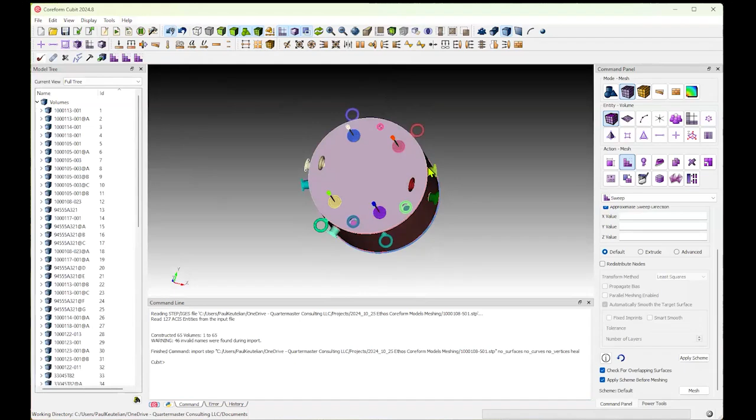I have Cubit here. As Matt mentioned and other videos have demonstrated, Coreform Cubit has an excellent import capability that lets you pull any geometry from other CAD tools. And I want to call out too that this is a pretty heavy assembly. It's got dozens of parts. There are some repeat parts in here, and opening this up in SolidWorks and NX can take a fair bit of time. And so even just getting to the relevant parts in Cubit is beneficial.

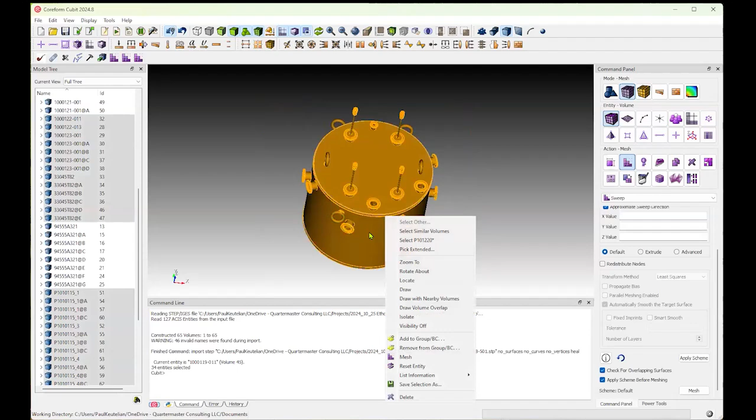Then again, if I'm trying to get to the heaters, it's easy to do, Control Shift Select and just clear out the materials that you don't need. We can start to see that the heaters are here underneath, and again, very lightweight. And here we can see there's some repeat parts here, and hitting the select similar volumes makes it easier to select these parts and then get rid of them also.

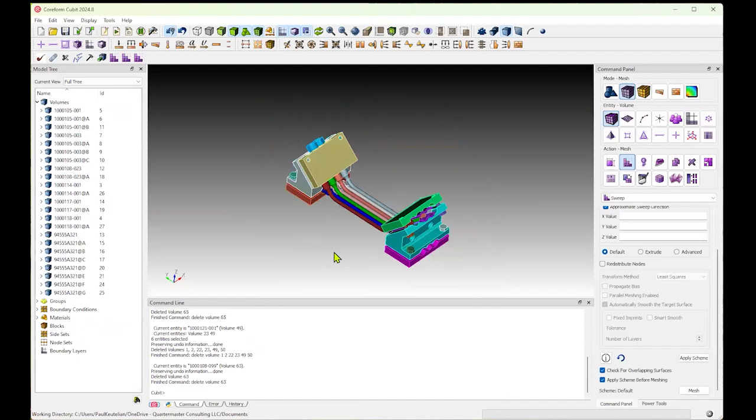And so we can see in 30 seconds, if I had no further knowledge about what the heaters are, what's in this thing, being able to use this tool will let me get there in under a minute. So for the sake of this demonstration, I want to go a little bit deeper and again, use similarity selection to select these bolts, these other clamps, and clear that away. And now I'm down to the heaters and these contacts.

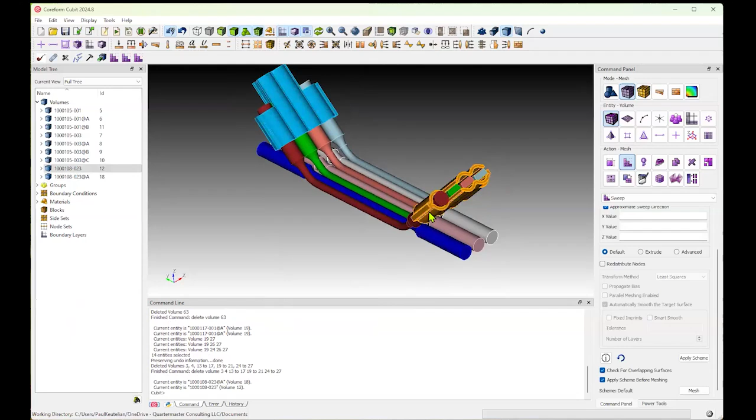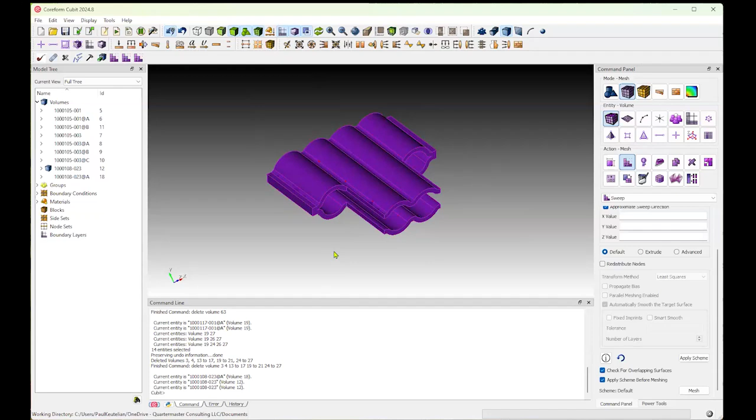And I want to share some tips about web cutting geometry like this. So this doesn't look that complicated, but what I've found is that with web cutting, what you're trying to get out of this is you're trying to make it easy for Coreform Cubit's mesher to understand the cleanest way to produce a mesh. And what I have found is that there are two goals that I pursue. One is to try and get to hex meshing everything as much as possible.

Hex meshes are nice because the matrix is a little bit stiffer, the solutions are a little bit more stable. They conform to geometry a little bit better, and it's fewer nodes. It's computationally easier because you have so many fewer nodes and connections for each of those versus like TET meshes.

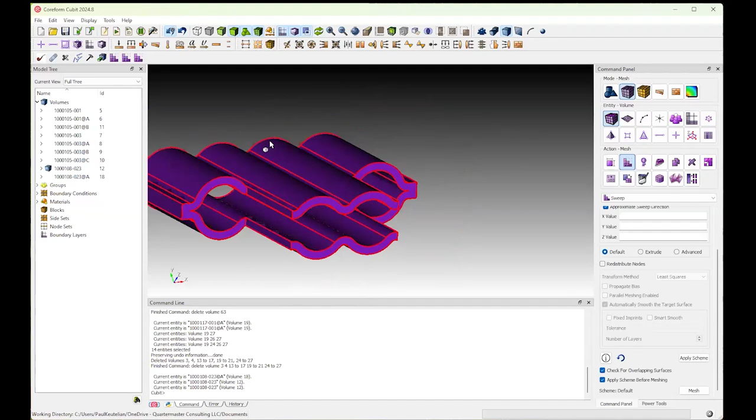So with something like this, there are some corners here. There's some complex curvatures here. So I'm going to go ahead and work through this a little bit. In this case, I'm going to say, well, I care about the corners. You could decompose this and just turn this into a smooth surface. But in my case, that's not what I need. So I'm going to start using these features to start cutting away and actually split this apart into multiple different bodies.

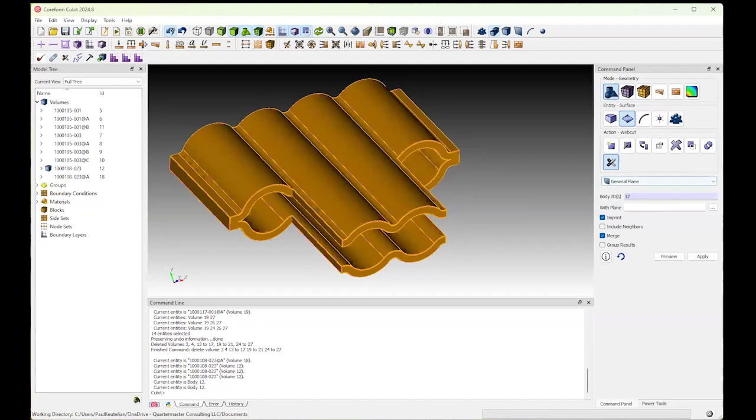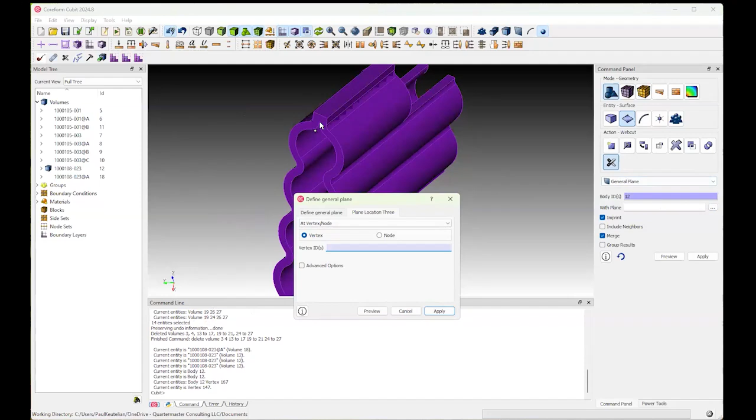In here, when I'm picking how to do this decomposition, what I would like to do is use as much of the features of the geometry itself to define where the cuts are going to be, because that enables me later when I check the journaling file to have a consistent solution if the geometry changes. Very much with these types of things, the team is testing out different parts and different types of solutions. So I can't very often rely on specific coordinates to work on.

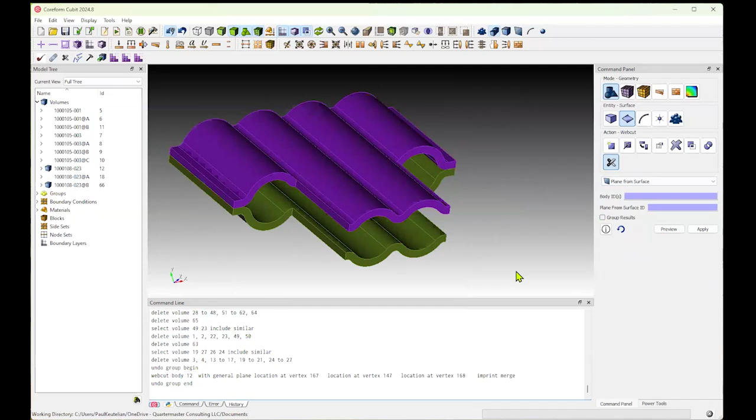So as I do this, you can see in the history, this is keeping track of specific vertices, specific locations, specific planes. And that's going to become handy later when I script this. So as you can see, I'm also cutting away at some of these wings here so that I can create rectangular pieces. And those have been a bit easier to mesh for me.

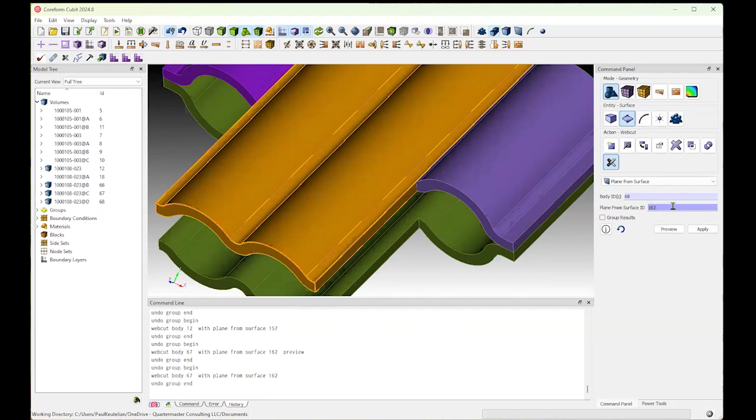And then here too, in this corner, this discontinuity, I'm going to want nodes at these specific positions too. So again, I'm going to make one more cut right here just so that the meshes between these volumes line up. And then, from other tutorials online, one of the lessons you learn is that you should mesh from the most constrained volume out. So I'm gonna isolate this one to be able to work on it.

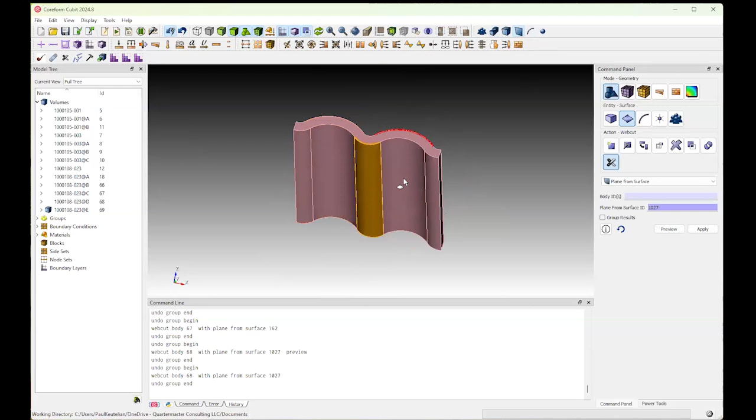And one of the things I want to show here is now we've got to deal with this complex surface. So you can see these different surfaces here. It would be a many-to-many mesh, which would be pretty difficult to do. But by using the composite feature, which I've shortcutted here, I can now look at this volume, control click to select them all, and there we go.

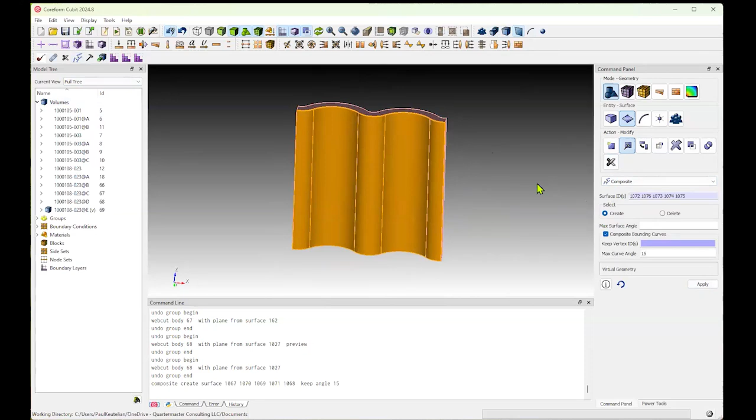Now this virtual geometry has been created, which lets Coreform Cubit know that this should be treated as one surface. And then in the mesh definition, I can focus on the resolution of that surface. So now I've changed this many-to-many surface sweep problem to a one-to-one. So now we can go here into the mesh.

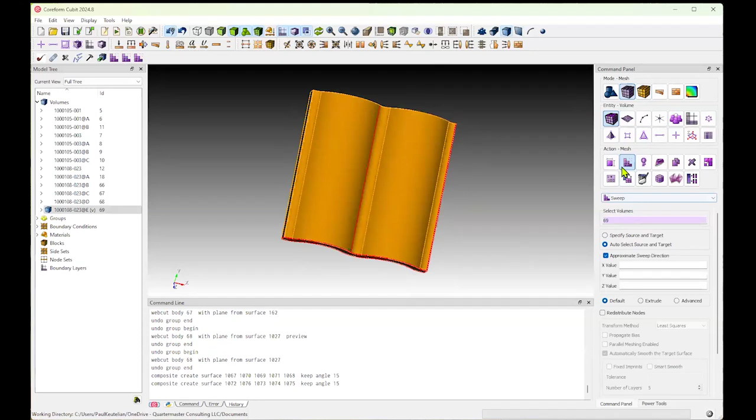A lot of my teams are not worried in the early phases about specific solutions to things. They're worried about a general idea of where things are to concentrate on. So if I'm doing that, I can assign this a map surface mesh. And then for sizing, in this specific case, automatic sizing actually works out okay for me, because again, they just need a general case of it. And this comes with your own experience with the tool. But of course, Coreform Cubit has many of the other features as well.

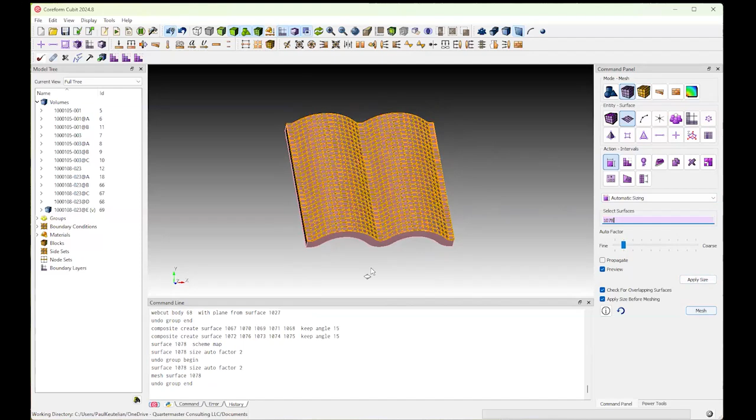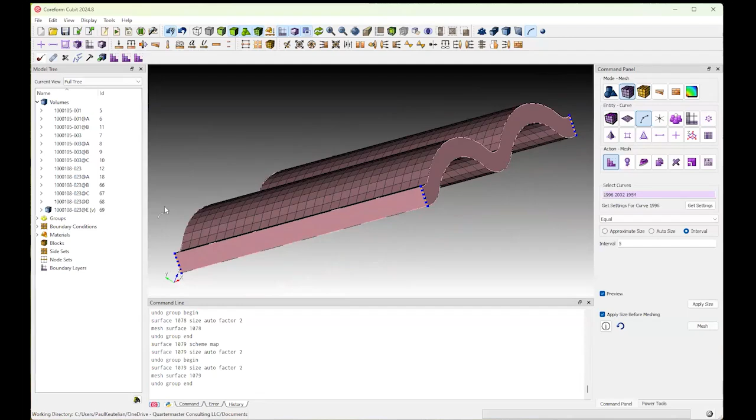So I'm going to do this surface up here, and then I'm going to make sure to apply the same properties down here and mesh these two. And then from your multiphysics modeler, so in this case, MOOSE, there's documentation on how many layers of nodes should be between top and bottom layer to get good solutions. So I believe the solution in MOOSE is at least 5. So I'm going to mesh these as a curve.

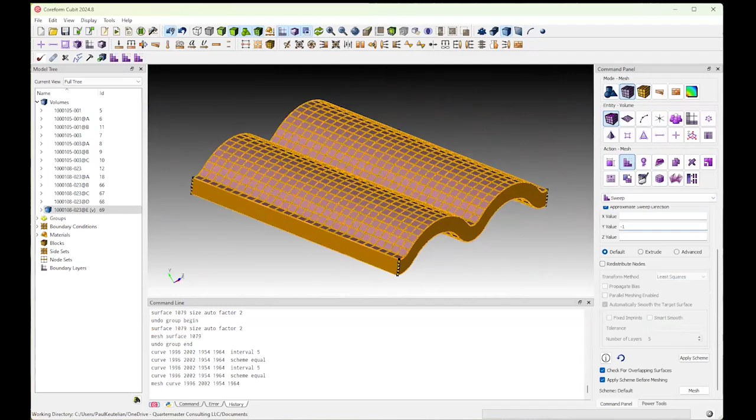So I've got these two surfaces, I've got this target, and now I can mesh this volume. So I've given Cubit enough information to be able to sweep through this properly. And it's pretty good at the auto direction. I'm going to give it a little hint by saying sweep in -y. It's a pretty close axis. And there you go. In just a few minutes, I've created this mesh just for this volume.

There are plenty of tutorials about how you take these volumes and combine them together into single bodies, which is how you'll be able to work with them within MOOSE.